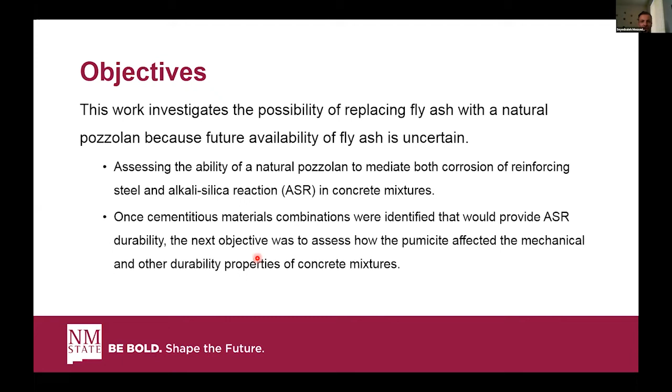We all know that when harmful ions like chloride penetrate concrete, corrosion is initiated, and this can happen through four main ways: capillary absorption, hydrostatic pressure, diffusion, and evaporative transport.

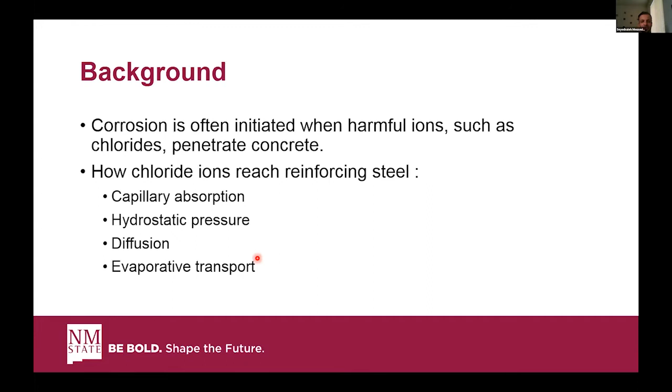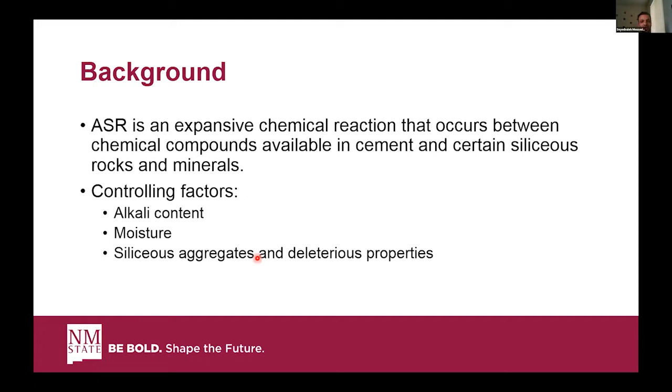On the other hand, ASR is an expansive chemical reaction that can produce internal tensile strain that leads to cracking, allowing chloride and other harmful ions to penetrate the concrete more. It can be influenced by alkali content, moisture, and how siliceous the aggregates are.

We have used pumicite, this natural pozzolan made from a pumicite deposit near Española, New Mexico. We have also used fly ash, because at least 20% fly ash is needed to be added to concrete in order to mitigate ASR expansion.

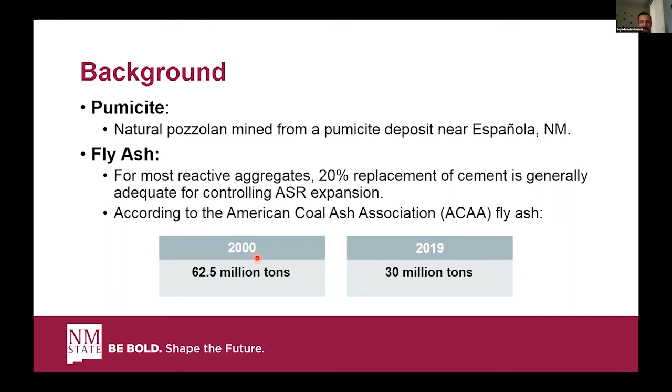But as the American Coal Ash Association reported, the production of fly ash is reducing. In 2000, 62.5 million tons of fly ash was produced, but just 19 years later, in 2019, only half of that, about 30 million tons of fly ash, was produced.

Here I'm going to talk about the materials and methods used in this project. This project was divided into two main parts. The first was the ASR test conducted on mortar bars based on ASTM C1567. 10 to 30% of the cement was replaced with pumicite, 30% cement was replaced with fly ash, and up to 40% of the cement was replaced with a combination of fly ash and pumicite.

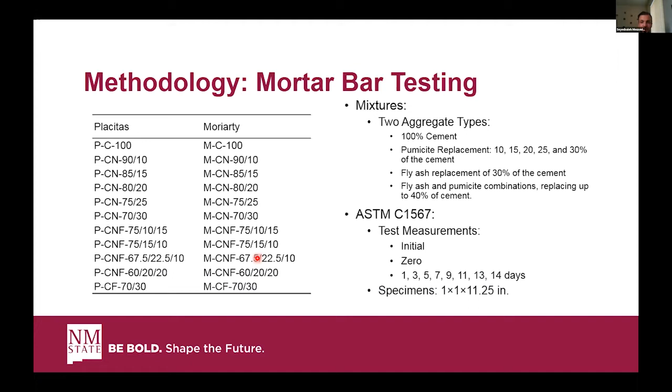In another part of this project, some mechanical tests and other durability tests were conducted. For the mechanical tests, first we conducted compression tests based on ASTM C39, and 28-day strengths were measured for 4x8-inch cylinder specimens.

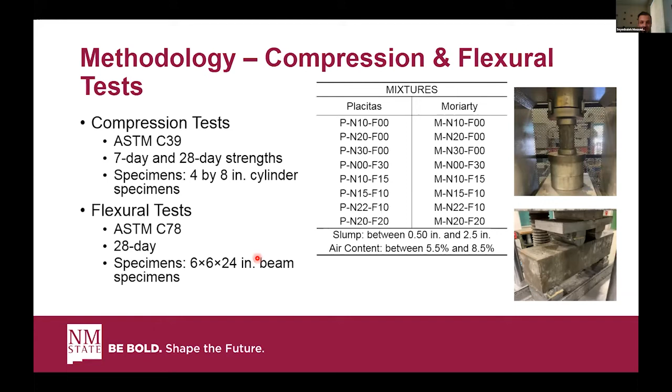We also conducted flexural tests based on ASTM C78, and 28-day strengths were measured for 6x6x24-inch beam specimens. For RCPT, we used ASTM C1202, and for surface resistivity we used AASHTO T358; these tests were performed on 4x8-inch cylinder specimens, as you can see in the figures.

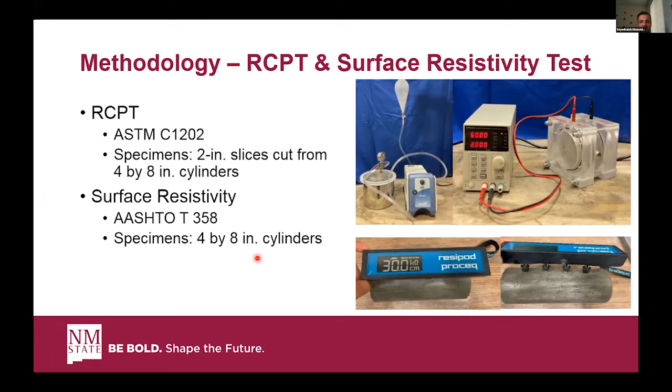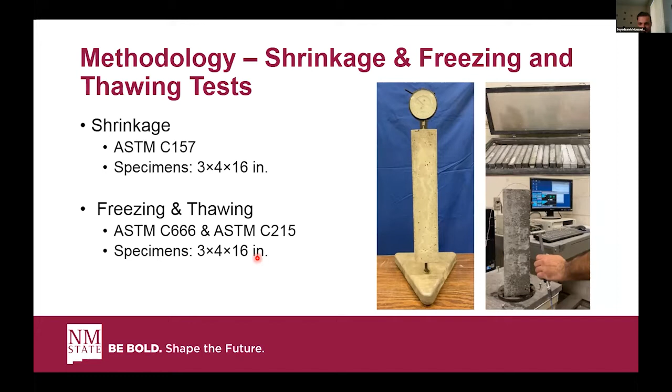As a result, first of all, we found that only 10% replacement of the cement with natural pozzolan is not adequate to reduce the ASR expansion below 0.1%, which is acceptable to many transportation agencies, for both types of aggregates we used in this project: Placitas and Moriarty.

But even with the Moriarty aggregate, in the right figure, we can see that mixtures with 15% replacement of cement with natural pozzolan did not qualify for ASR expansion, because the expansion was just marginal, about 0.1%.

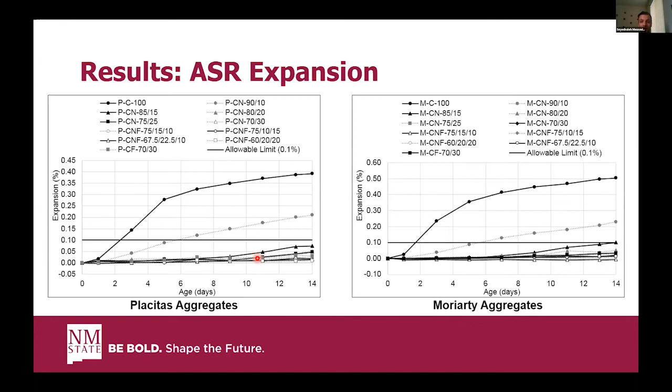In this slide, we can see that mixtures with just 30% fly ash had much more expansion than mixtures with 30% natural pozzolan, for both types of aggregates. This suggests that natural pozzolan can be a good alternative to fly ash in terms of ASR expansion.

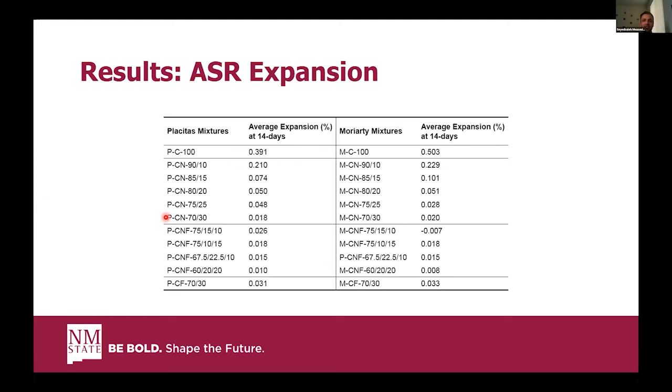For the compressive results, in the left figure, we can see that with increasing natural pozzolan, the compressive strength decreased for both types of aggregates. But the more important point is that the compressive strength of mixtures with 30% fly ash was really close to mixtures with 30% natural pozzolan.

In the flexural results, in the right figure, we can see that only one mixture's modulus of rupture was slightly less than 600 psi, but it was really marginal. All remaining mixtures had a modulus of rupture more than 600 psi, which is acceptable to many transportation agencies for both types of aggregates. So again, we can suggest that this natural pozzolan, pumicite, can be a good alternative to fly ash in terms of both compressive and flexural test results.

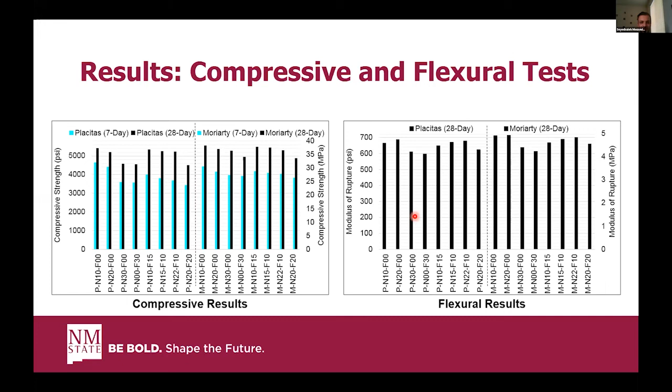Based on the RCPT, we found that all mixtures' chloride ion permeability was in the 'very low' category based on AASHTO T277/ASTM C1202. With increasing natural pozzolan, the permeability decreased and came closer to the negligible area for both types of aggregates. But the more important point is that the permeability of the mixture with 30% fly ash was really close to the mixture with 30% natural pozzolan.

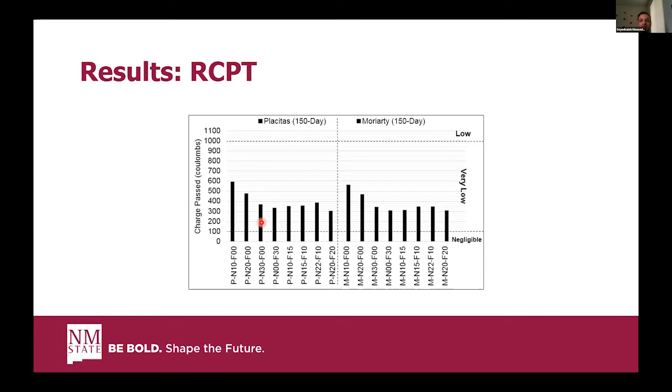So again, we can suggest that pumicite is a good alternative to fly ash in terms of RCPT, because the permeability results of mixtures with the same percentage of SCM were really close to each other.

We performed surface resistivity tests after two ages: the first at 28 days, shown in the left figure, and the second after 180 days, which we call later age. In both ages, with increasing natural pozzolan, the surface resistivity increased, meaning the permeability decreased for both types of aggregates.

The more important point is that in the 28-day results, the mixture with 30% fly ash had much higher permeability than the mixture with 30% natural pozzolan. But when we tested after 180 days, the permeability of the 30% fly ash mixture was really close to that of the 30% natural pozzolan mixture.

This can obviously be justified by the slow reaction of the fly ash. The good point here is that the later age results for surface resistivity and chloride ion permeability for mixtures with fly ash and mixtures with natural pozzolan at the same percentage were very close to each other. Again, natural pozzolan can be a good alternative to fly ash in terms of chloride ion permeability.

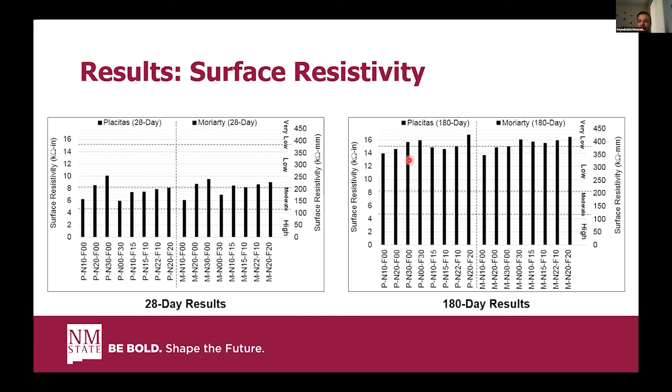For the shrinkage test, we found that the final shrinkage of all mixtures was less than 709 microstrain, which is acceptable to many state departments of transportation. With increasing natural pozzolan, the shrinkage decreased for both types of aggregates. The least final shrinkage was found in mixtures with the greatest total SCM, which had 20% natural pozzolan and 20% fly ash.

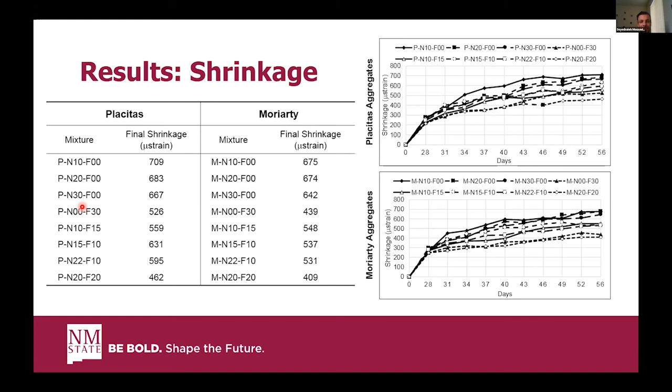The more important point is that mixtures with 30% fly ash had final shrinkage slightly less than mixtures with 30% natural pozzolan. Both are acceptable because they are less than about 670 microstrain. But you should be careful when using natural pozzolan in an area where shrinkage is important, because the shrinkage can be more than with the mixture with 30% fly ash.

For the frost resistance test, we found that the durability factor, the relative dynamic modulus after 300 cycles of freezing and thawing, was more than 78.7 for all mixtures for both aggregate types. The good point is that mixtures with 30% fly ash had a durability factor slightly more than mixtures with 30% natural pozzolan, which suggests we should be careful when using natural pozzolan in an area where frost resistance is important.

But the good news is that most of them are acceptable because they are more than maybe 80, so we can use them anyway.

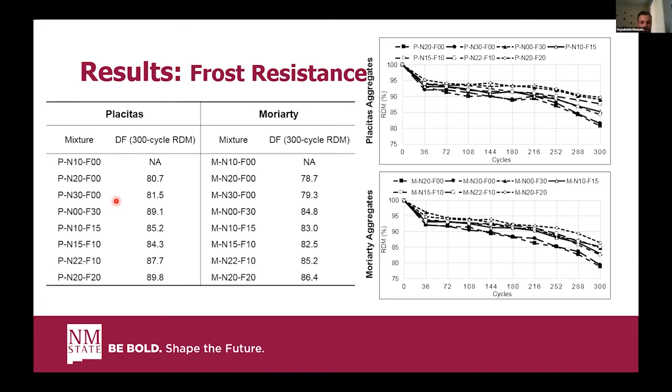Here I'm going to wrap the results up as a conclusion. First, to mitigate ASR we need at least 20% natural pozzolan, and the expansion of mixtures with 30% natural pozzolan was really less than mixtures with 30% fly ash.

However, ternary mixtures are suggested to be used to mitigate ASR. At least 10% fly ash is suggested to be added alongside natural pozzolan to have negligible ASR expansion.

For the compressive test, we found that with increasing natural pozzolan, the compressive strength decreased, but mixtures with 30% natural pozzolan had compressive strength really close to mixtures with 30% fly ash. So we can suggest that natural pozzolan can again be a good alternative to fly ash.

In the flexure test, we found that almost all mixtures, other than the one with 30% fly ash, had an MOR greater than 600 psi, which is again acceptable to many transportation agencies.

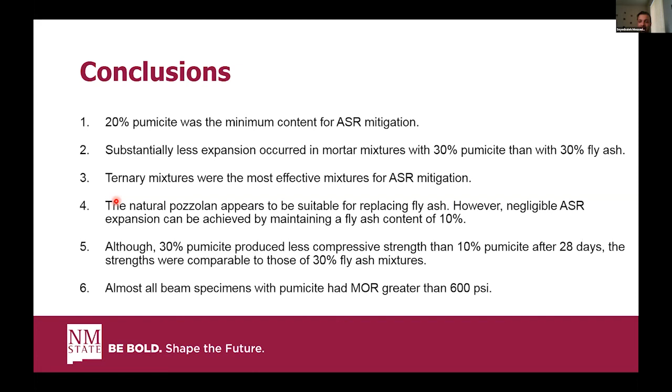For RCPT, we found that the total charge passed, based on ASTM C1202, was less than 600 Coulombs, which puts them in the 'very low' category. The penetration was very low.

The permeability decreased with increasing natural pozzolan, approaching the negligible range. The mixtures with the greatest amount of SCM, 20% fly ash and 20% natural pozzolan, had the least chloride permeability.

For the surface resistivity test, we found that with increasing natural pozzolan, like RCPT, the permeability decreased, and the mixtures with 30% fly ash and 30% natural pozzolan had very similar later-age permeability. Generally, with increasing total SCM the permeability decreased, though this isn't true for all mixtures.

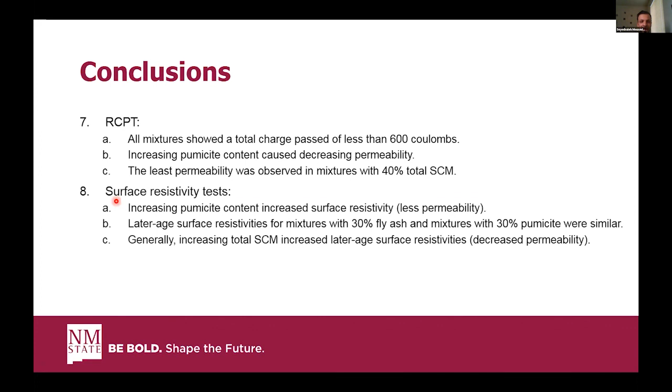For the shrinkage test, we found that the final shrinkage for all mixtures was less than 710 microstrain, and with increasing natural pozzolan content, the shrinkage decreased. The mixtures with the greatest total SCM, 40%, showed the least shrinkage.

For the freezing and thawing test, we found that the durability factor for all mixtures was greater than 75, but mixtures with 20 and 30% natural pozzolan had the least durability factor. The mixture with 30% natural pozzolan had a durability factor less than the mixture with 30% fly ash.

Overall, based on this set of experiments including mechanical tests and durability tests, we can suggest that natural pozzolan can be a good alternative to fly ash. In terms of ASR, RCPT, chloride ion penetration, and corrosion, we can use this natural pozzolan instead of fly ash.